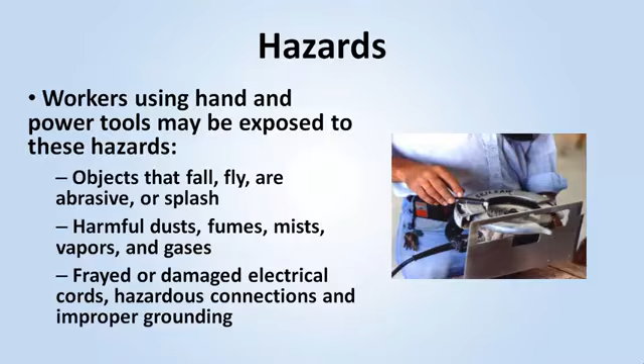Some basic safety rules to follow when working with tools are: maintain tools regularly, use the right tool for the job, inspect the tool before use, operate the tool according to manufacturer's instructions, use the right personal protective equipment, and use guards.

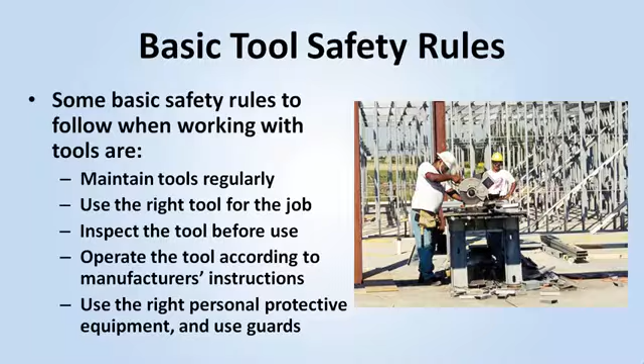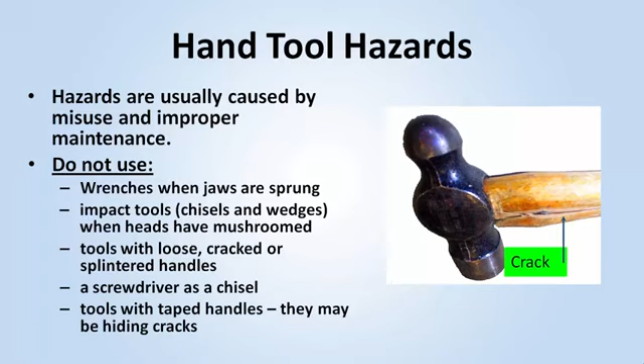Hand tool hazards are usually caused by misuse and improper maintenance. Do not use wrenches when jaws are sprung, impact tools, such as chisels and wedges, when heads have mushroomed, tools with loose, cracked, or splintered handles, a screwdriver as a chisel, or tools with taped handles, as the tape may be hiding cracks. For example, if a screwdriver is used as a chisel, the tip of the chisel may break and fly off, hitting the user or other employees.

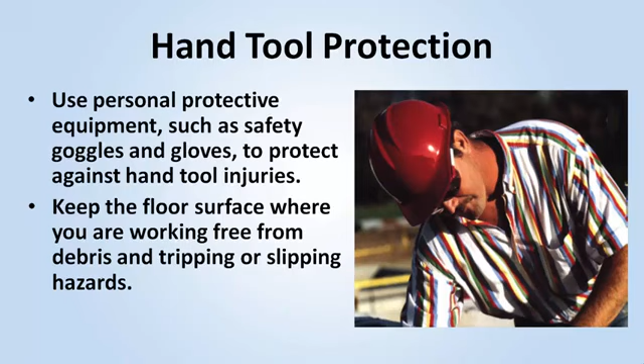Use personal protective equipment, such as safety goggles and gloves, to protect against hand tool injuries. Keep the floor surface where you are working free from debris and tripping or slipping hazards. Keep cutting tools sharp. Power tools must be fitted with guards and safety switches and are extremely hazardous when used improperly.

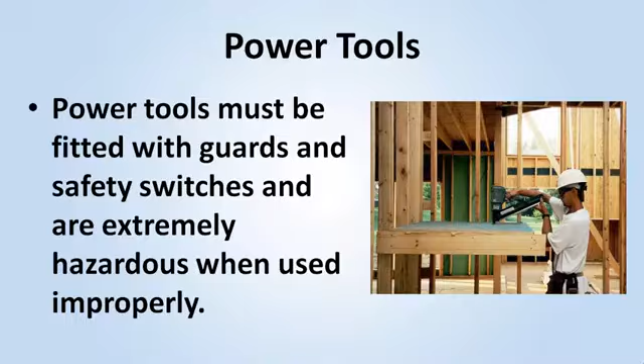Handheld power tools must be equipped with one of the following: a constant pressure switch which shuts off power upon release, such as a circular saw, chainsaw, grinder, or handheld power drill, or an on-off switch that you would typically find on routers, planers, laminate trimmers, shears, jigsaws, nibblers, or scroll saws.

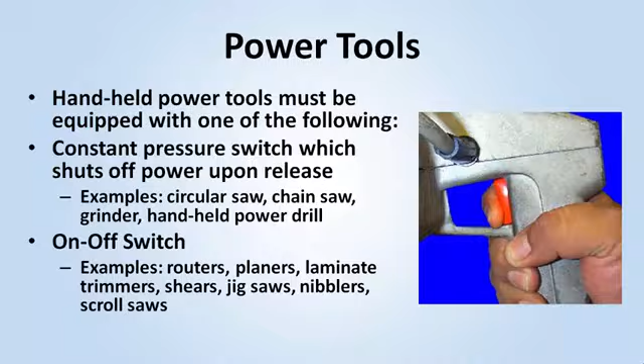Always disconnect power tools when not in use, before servicing and cleaning, and when changing accessories. Keep people not involved with the work away from the work. When possible, always secure work with clamps or a vise, freeing both hands to operate the tool. Don't hold the switch button while carrying a plugged-in tool. Keep tools sharp and clean. Consider what you wear. Loose clothing and jewelry can get caught in moving parts.

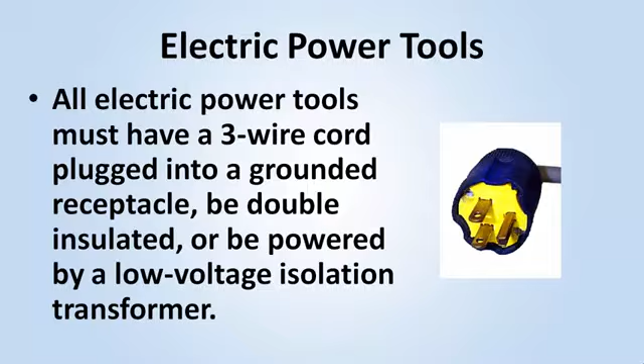Remove damaged electric tools and tag them "Do Not Use." Never carry portable tools by the cord or use electric cords to hoist or lower tools. Don't yank an electric cord or hose to disconnect it. Always keep cords and hoses away from heat, oil, and sharp edges. All electric power tools must have a 3-wire cord plugged into a grounded receptacle, be double insulated, or be powered by a low-voltage isolation transformer.

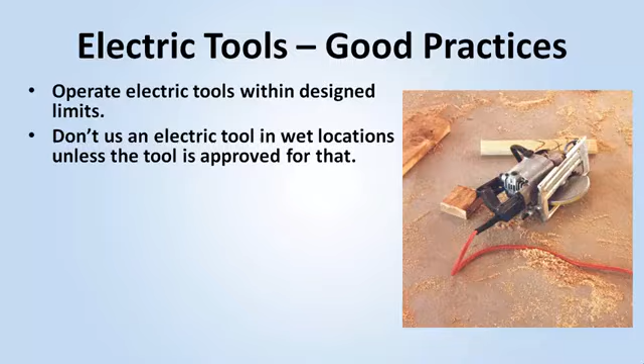Operate electric tools within designed limits. Don't use an electric tool in wet locations unless the tool is approved for that. Store the tool in a dry place. Use gloves and safety shoes. Keep work areas where you'll be using the tool well lit. Ensure cords don't present a tripping hazard to yourself or others in the work area.

Abrasive wheels and tools may throw off flying fragments. As such, equip with guards that cover the spindle end, nut, and flange projections, maintain proper alignment with the wheel, and don't exceed the strength of the fastenings. Guard the tool so that a minimal amount of the wheel is exposed.

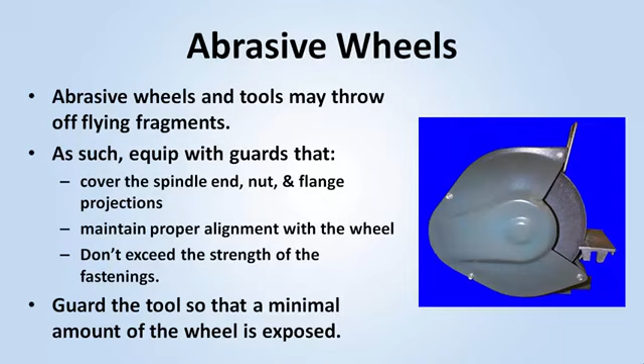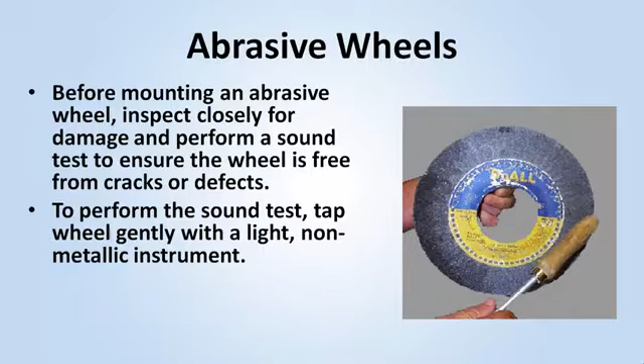Before mounting an abrasive wheel, inspect closely for damage and perform a sound test to ensure the wheel is free from cracks or defects. To perform the sound test, tap the wheel gently with a light, non-metallic instrument. If the wheel sounds cracked or dead, do not use it because it could fly apart. To prevent cracking, fit the wheel on the spindle freely and tighten the spindle nut enough to hold the wheel in place without distorting the flange.

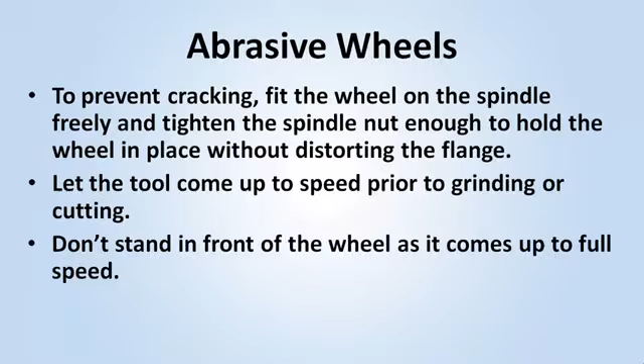Let the tool come up to speed prior to grinding or cutting. Don't stand in front of the wheel as it comes up to full speed. Use eye and/or face protection at all times when using an abrasive wheel. Keep work rests not more than 1/8 of an inch from the wheel surface. This prevents jamming the work between the wheel and the rest, which may cause the wheel to break. Never adjust the wheel while it's rotating.

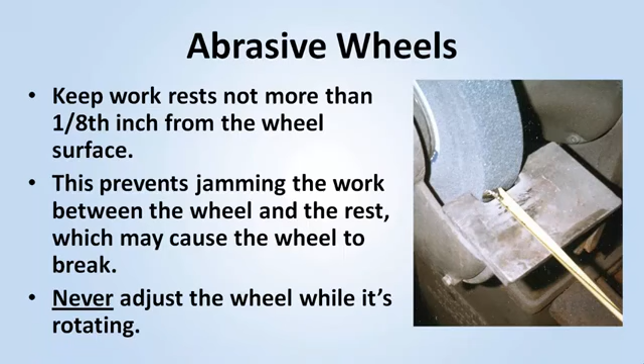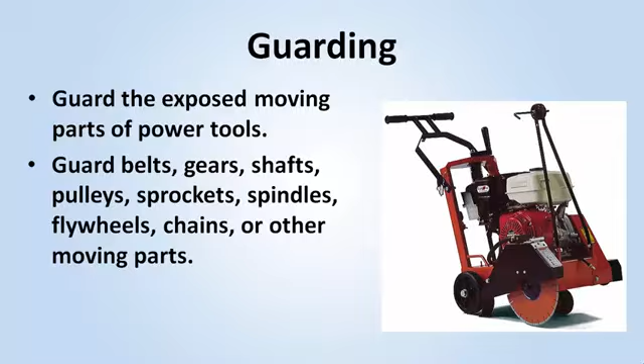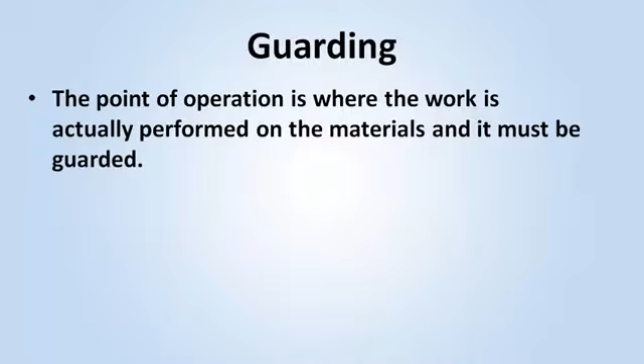Guard the exposed moving parts of power tools. Guard belts, gears, shafts, pulleys, sprockets, spindles, flywheels, chains, or other moving parts. Never remove a guard when a tool is in use. The point of operation is where the work is actually performed on the materials, and it must be guarded. The guarding device shall be designed and constructed to prevent the operator from having any part of his body in the danger zone during the operating cycle.

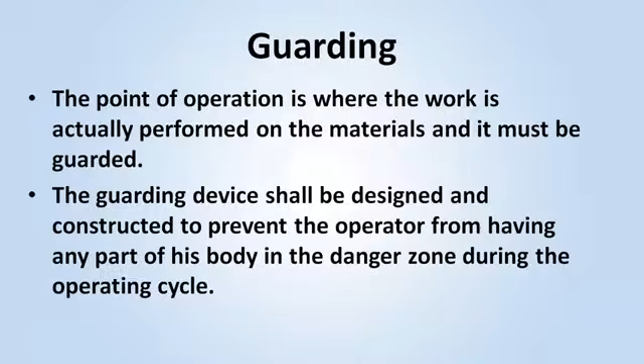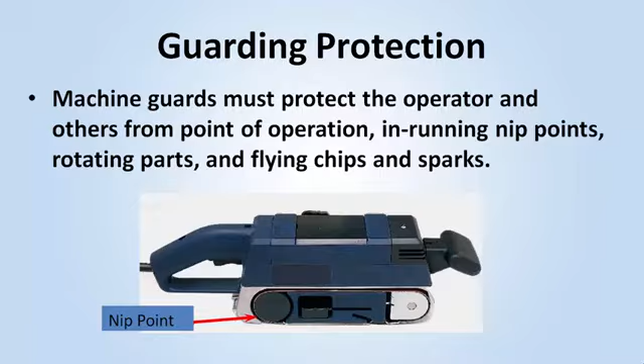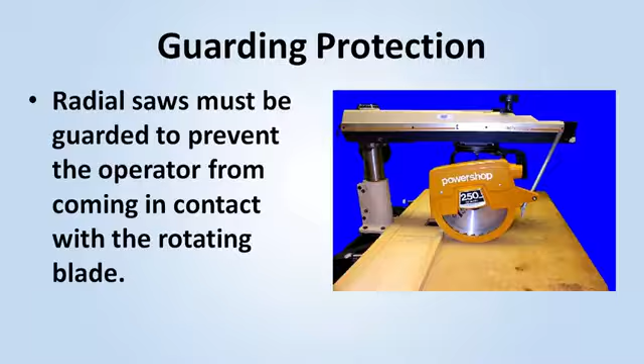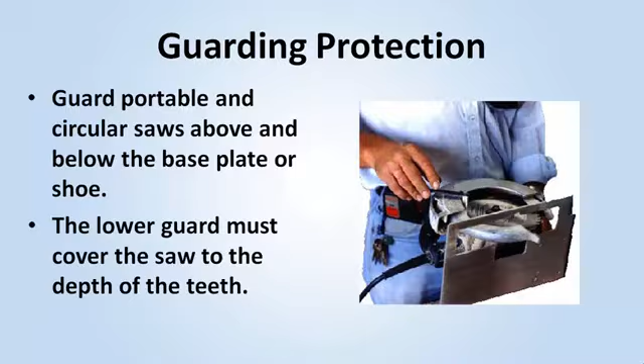Machine guards must protect the operator and others from point of operation, in-running nip points, rotating parts, and flying chips and sparks. Radial saws must be guarded to prevent the operator from coming in contact with the rotating blade. Guard portable and circular saws above and below the base plate or shoe. The lower guard must cover the saw to the depth of the teeth. Each circular cross-cut table saw shall be guarded by a hood.

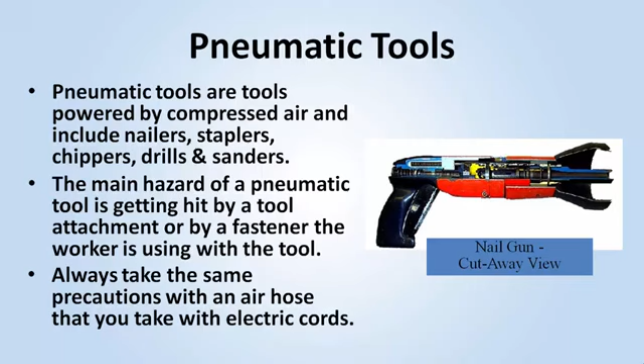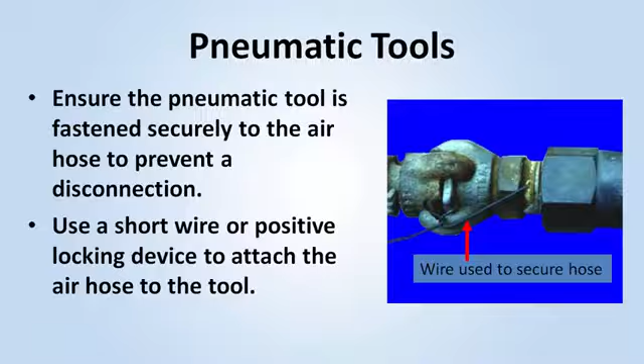Pneumatic tools are tools powered by compressed air and include nailers, staplers, chippers, drills, and sanders. The main hazard of a pneumatic tool is getting hit by a tool attachment or by a fastener the worker is using with the tool. Always take the same precautions with an air hose that you take with electric cords. Ensure the pneumatic tool is fastened securely to the air hose to prevent a disconnection. Use a short wire or positive locking device to attach the air hose to the tool. Secure pneumatic power tools to the hose by some positive means to prevent the tool from becoming accidentally disconnected.

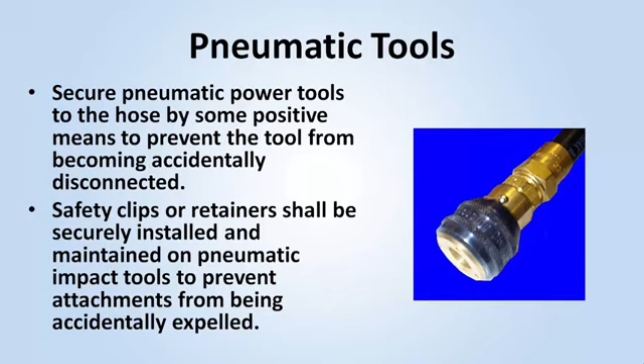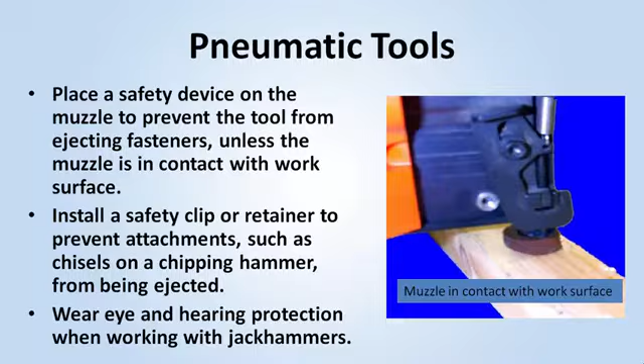Safety clips or retainers shall be securely installed and maintained on pneumatic impact tools to prevent attachments from being accidentally expelled. Place a safety device on the muzzle to prevent the tool from ejecting fasteners, unless the muzzle is in contact with work surface. Install a safety clip or retainer to prevent attachments, such as chisels on a chipping hammer, from being ejected. Wear eye and hearing protection when working with jackhammers. Don't use compressed air for cleaning, unless the compressed air is reduced to less than 30 psi with effective chip guarding and personal protective equipment.

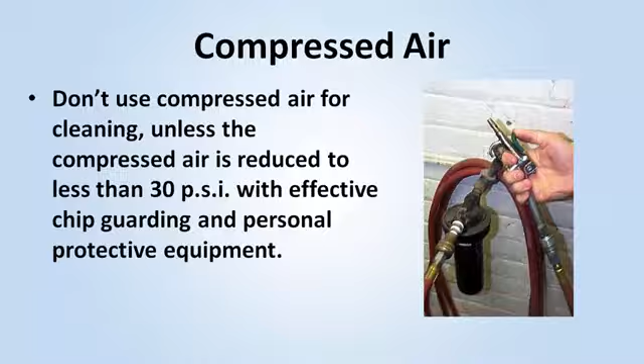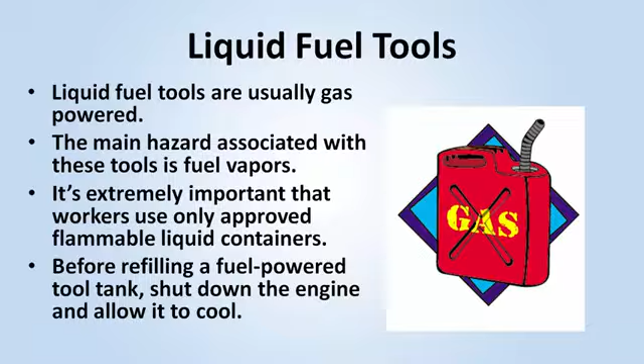Liquid fuel tools are usually gas-powered. The main hazard associated with these tools is fuel vapors. It's extremely important that workers use only approved flammable liquid containers. Before refilling a fuel-powered tool tank, shut down the engine and allow it to cool.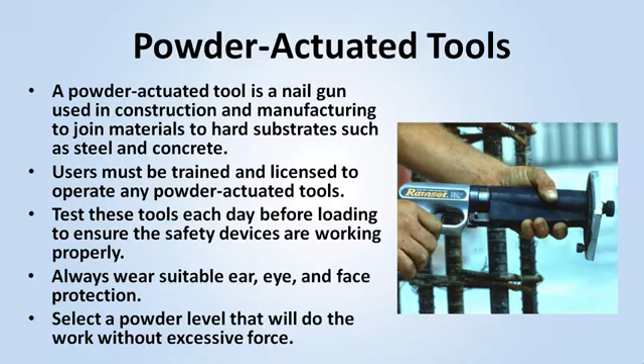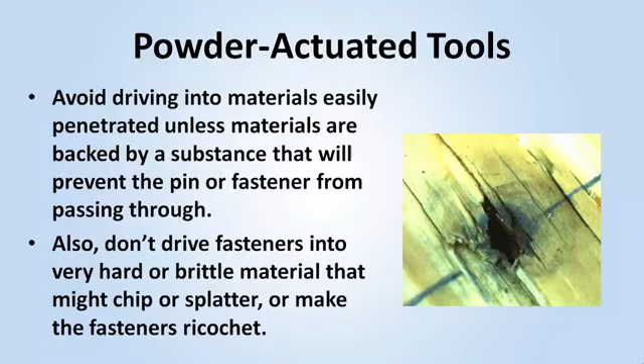Avoid driving into materials easily penetrated unless materials are backed by a substance that will prevent the pin or fastener from passing through. Also, don't drive fasteners into very hard or brittle material that might chip or splatter or make the fasteners ricochet. Don't use a powder-actuated tool in an explosive or flammable atmosphere. Inspect the tool before use to ensure it is clean, moving parts operate freely, and the barrel is free from obstructions and has the proper shield, guard, and attachments. Don't load the tool unless using immediately, and never leave a loaded tool unattended.

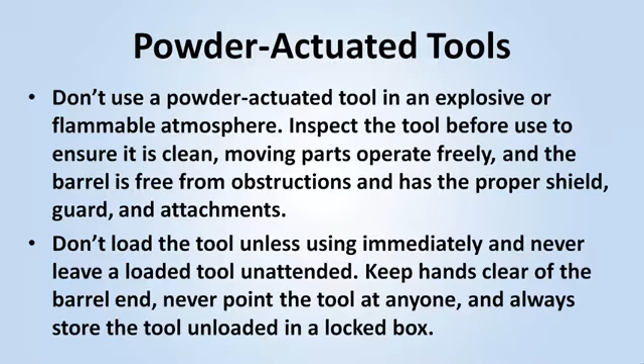Keep hands clear of the barrel end, never point the tool at anyone, and always store the tool unloaded in a locked box. In summary, hazards are usually the result of improper tool use or not following one or more of these protection techniques: inspecting the tool before use, using personal protective equipment, using guards, properly storing the tool, or using safe handling techniques.